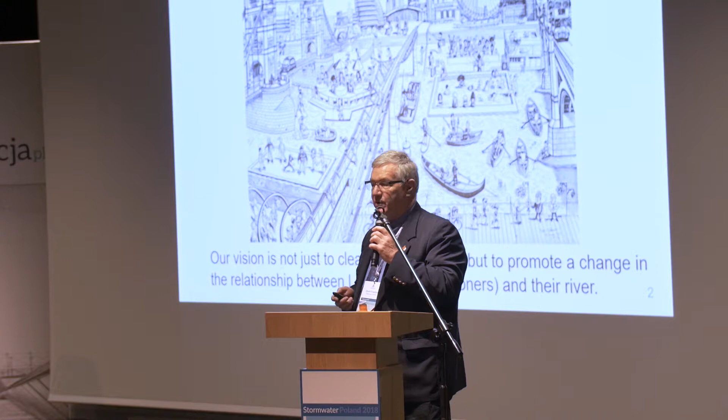We have various challenges, which is to build a new sewer. You know, you may say that's not very innovative. We're building essentially a big sewer throughout central London, but we have a vision to reconnect the people of London to the river. A lot of times their back is turned to the river, so we want them to reconnect to that wonderful facility that's the river.

And our press renamed it the Super Sewer because it is a big sewer, 25 kilometers connecting to another 6.5 kilometer tunnel, so it's a major piece of infrastructure. If we go back long enough in time, London is really built on a swamp, and there were all of these tidal inlets, tidal channels, and over time, all the way from Henry VIII up to the early 1800s, those channels were culverted over and became what we call the lost rivers of London.

In the early 1800s, huge amount of development. Population grew from about 1 million to 2 to 3 million. That put a lot of pressure on those channels because before they were just stormwater channels, and all of a sudden they got their sewage connected to them. So they became pretty rancid. And that led to what we all call in London the Great Stink of 1858, when Parliament even decided to look at moving to Oxford because the smell was so bad, because the river was just an open sewer.

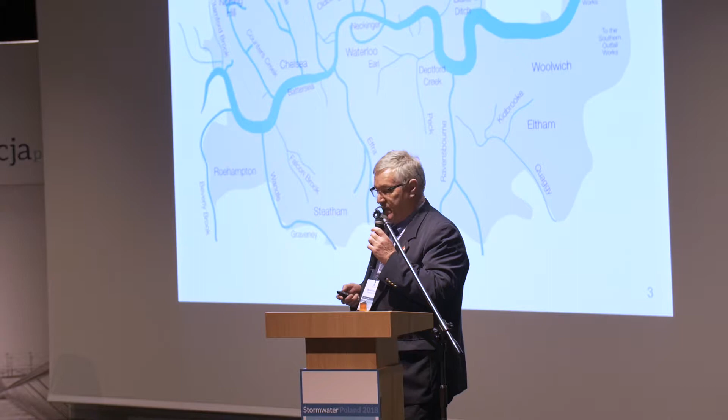That instigated the building of probably the first major interceptor system in the world, and Joseph Bazalgette built this, and you can see here the interception of that sewage that was going into the river. It transported it to the east, and they built large storage tanks, so on the outgoing tide they would flush it and send it over to France and let them deal with it.

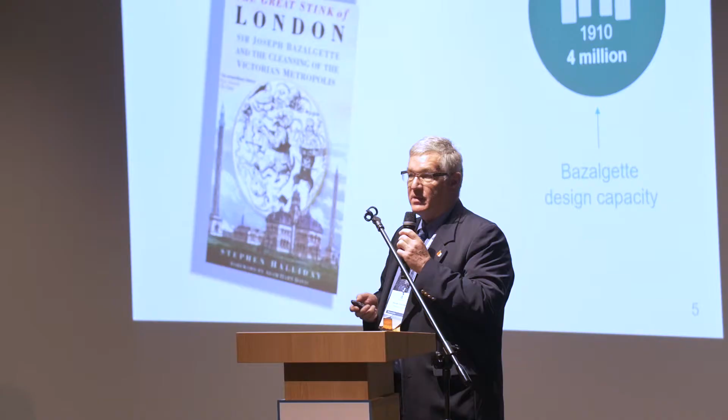The design challenge was, Bazalgette had a population of 2 million to handle. He designed for 4 million, and that was exceeded in the 1910s, so his design was quickly overwhelmed by the population. Fortunately, that interceptor system was made of brick. They used Portland cement for the first time, and today it's still the backbone of London's sewage system. And if you go in and explore it, as some people do, it is in wonderful shape, and it'll last for another 150 years if it's looked after.

We've also mentioned change. One of the big changes that we deal with in London is population growth. And we're trying to size this project to handle 2 million more people, as well as the development that's going on. So this collage basically shows the pressures that we have. Southeast England, and London in particular, has a water supply shortage. They don't have enough water during drought to supply everybody. Everybody wants a washing machine and a dishwasher, so water use goes up.

Development. You know, if you go to London, you'll see development all along the river, which is where the combined sewers are located. So that's more pressure. We have looked at using green infrastructure or sustainable urban drainage, but there's very little space to put that sort of facility in or to retrofit existing development. It's very costly, very disruptive. And of course, what all that leads to is our CSOs, a typical little picture. When it rains, it overwhelms the interceptor system, discharges to the river, and this is an example of one of our major discharges.

In the 1990s until the 2000s, Thames Water, I'm really here representing Thames Water and our new utility called Tideway, developed a scheme that looked at 3 major components. One was the improvements, both in capacity and treatment processes, to 5 major treatment works. They have built what we call the Lee Tunnel, which captures one of the largest CSOs that discharges into a more sensitive water body, that is built and in operation. And in fact, last November, we inspected it and it was in pretty good shape.

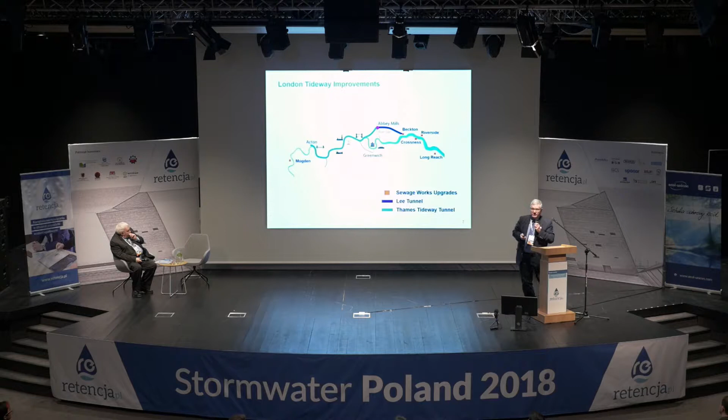To get where we are today, we had an extensive public consultation process. You can probably imagine the turmoil that people would have if we came along and said, this is where we're going to put a major construction site that's going to be there for 7 to 10 years. What do you think of it? And some of those public hearings were very contentious, and in one case we had to get security to escort ourselves out because the people were not very happy with the idea. But we got over it by being honest, by going out and talking to people and explaining why we need it and what we were doing to minimize the disruption to the neighborhood.

Another part of it was planning. The government regulations were such that we could not get a planning permit for the 14 different boroughs that we would go through in London. So we went to the UK government, and there was a process that we could follow to get what is called a development consent. Little did we know that that would take over 150,000 pages of testimony and detailed technical work to prove to the infrastructure planning group that we needed to build this project.

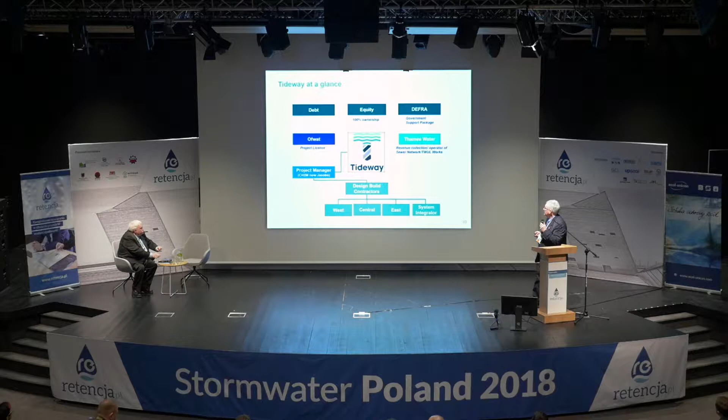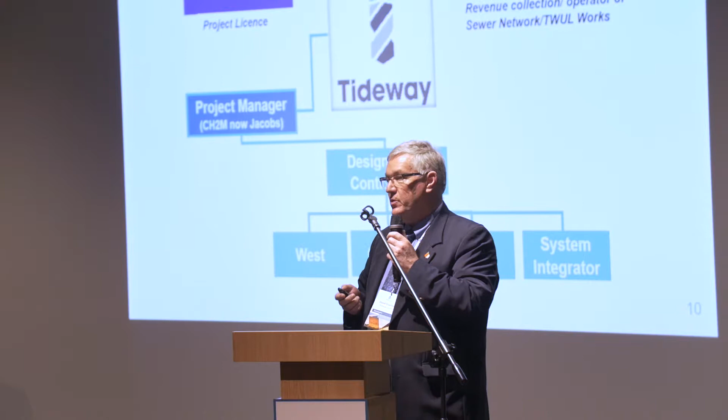I'd mentioned that Thames Water developed the 3 legs of the London Tideway improvements. Thames Water decided that the risk and the cost of doing that would be too much for that single utility to handle. So a new wastewater utility was formed. It's technically called Bazalgette Tunnel Limited after the original Victorian engineer. We operate under the name of Tideway.

And what is kind of unique about this is, as well as going out for a competitive bid for the contractors, we went out for a competitive bid for the financiers. So financial companies were given the opportunity to come in and say, we can finance the construction, finance the operation of this scheme. And it came about that the equity came out of the major insurance companies. In the next slide, I'll show a little bit more.

But what was also very unusual was the involvement of government. Now, Ofwat is the Office of Water. I'm sure you have the same here in Poland. That's the regulatory government agency. It sets the utility rate, how much people will pay for this. And the first thing that we found during our consultation was estimating this would cost about £80, 400 in Polish units, I believe, per year.

With the competitive bidding we did for the financial part of it, the financial companies came in and said, well, we can finance this at a much lower interest rate, given the risk that we're associated with, the surety of getting the money from the customers. That is now £30 a year. So it was a big reduction just because we competitively bid the financing.

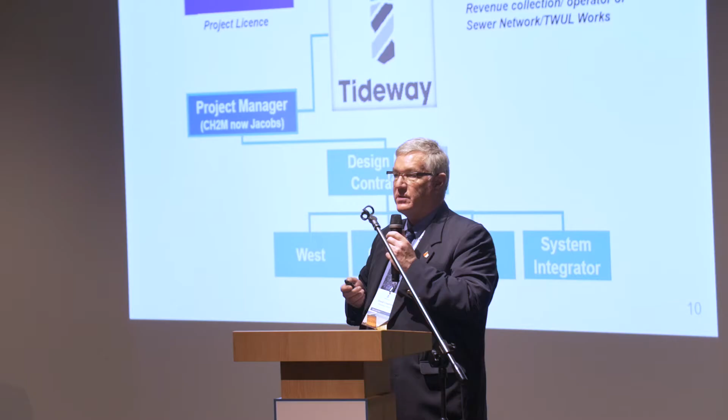We also have another surety from DEFRA, which is the regulatory agency in the UK government that sets pollution limits, if you will. And what they said is, if everything goes wrong, like a tunnel machine breaks or the tunnel machine sticks, which happens for major tunneling, or a major design construct company goes bust, the government would step in and finish the project. That also gives surety to the financial folks and reduces the risk of the whole scheme. I'll go on to the next one.

So this is basically our structure. We have 3 major works contractors in the east, west, and central, and a system integrator that comes along really for the SCADA part of the project. Above all of this is the financiers, and you can see some major insurance companies are part of this. And what we have found is 2 million UK pensioners, their pension is getting the return from building this project, which is very positive. Underneath all of that is our project manager. I work for what is now Jacobs. Jacobs took over CH2M last December, so even bigger consulting firm.

A little bit on the scheme. As I said, we have 3 major works contractors in the east, west, and central. And that's really because of the geology that we're dealing with. In the west, we have clay, so the tunneling methods and the machines are different. In the central, we have basically sands and gravels, a little bit of clay, a little bit of chalk at the transition between the two. Then in the east, we have chalk with some flints in it. So each one of those have unique construction requirements.

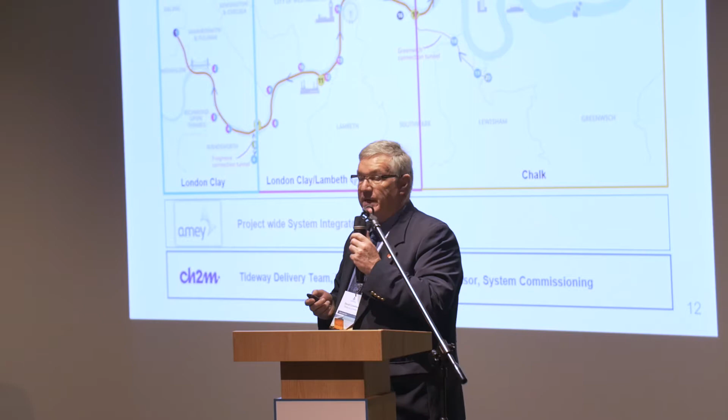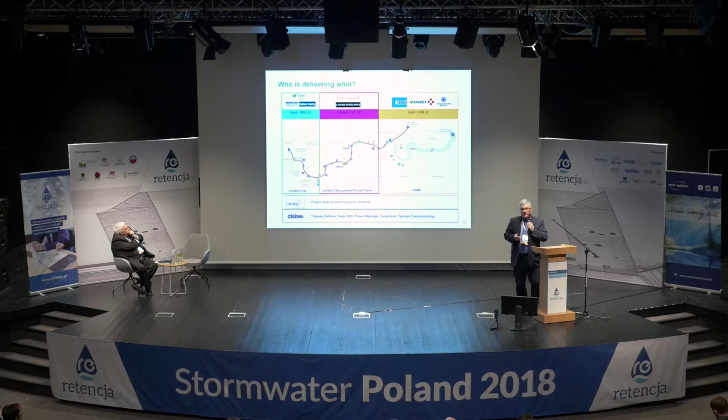And at the top, there are the joint ventures that are formed to build these different pieces. This part of the project is £4.2 billion. The other 2 parts, the works improvements and the Lee Tunnel, were roughly £1.4 billion. So overall, you may as well call it £7 billion as the total cost of improving the water quality of the tidal Thames.

We like to think we're transformational when it comes to health and safety. And one of the things we set up was this center called EPIC, and it tells you there it's an Employee Project Induction Center. We require every worker, every person working on the project, even designers or secretaries in the office, have to go through this

training. What it is, we've hired real actors who reenact a major site incident where a young worker was killed because he wanted to get the job done, got on with it. He hit a high voltage electric line, got burnt, and died. And it goes through the whole life cycle of that incident, to the police investigating it, the bottom left picture, to the pressures from the management who's off in a remote office somewhere, calling the works manager to say, well, why aren't you getting this done?

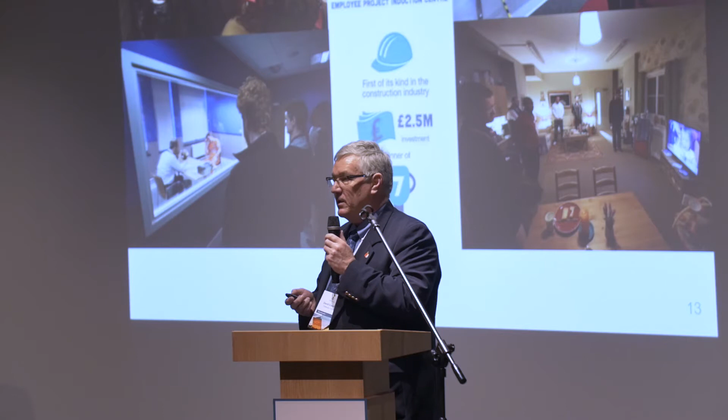All the way through to the impact on the young family that the dad died. So that's the bottom right picture. So we have these processes that go through. It's a whole day experience, and over 7,000 people have gone through that. The long and short of it is, this is a picture of major incidents that cause work-related injuries that you have to take days off.

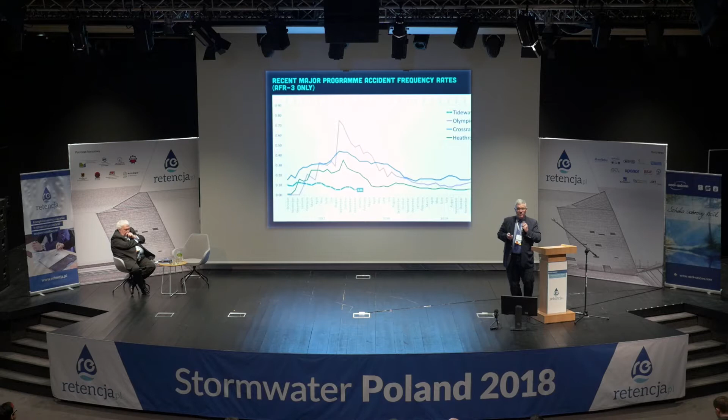Normal projects, there's a ramp up, then there's a bit of a bulge, and what we have here is for the Olympics, the 2012 Olympics, all in London. The Crossrail project, which is a major rail project going across London. The last one is Heathrow Terminal 5. All had a bulge after the project was really getting into the full construction. We're maintaining a very low rate of injuries, simply because people are more aware and more attuned to avoiding injuries when you're doing major construction like this.

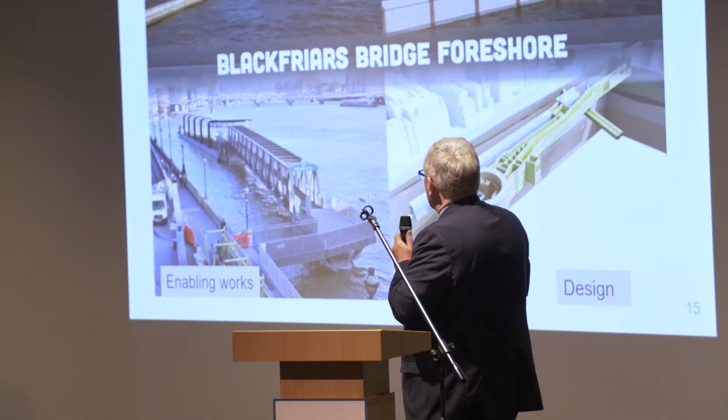Excuse me, 2 minutes left. 2 minutes are left. I got 20 minutes, by the way.

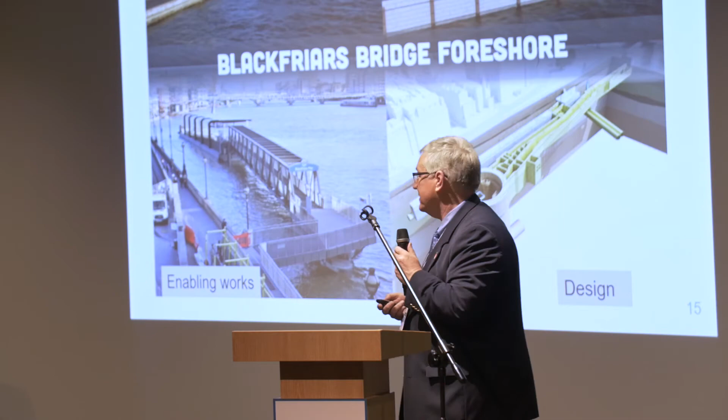I need it. A typical site, this is Blackfriars, just behind the building there on the left is St. Paul's. What we had to do was move that pier to the other side of the bridge, which is what you see at the bottom left. At the end of it all, we are creating some more public space for folks to enjoy the river and the scenes of London. But underneath all of that, it's all the engineering. So that's the shaft that connects one of our major CSOs to the tunnel.

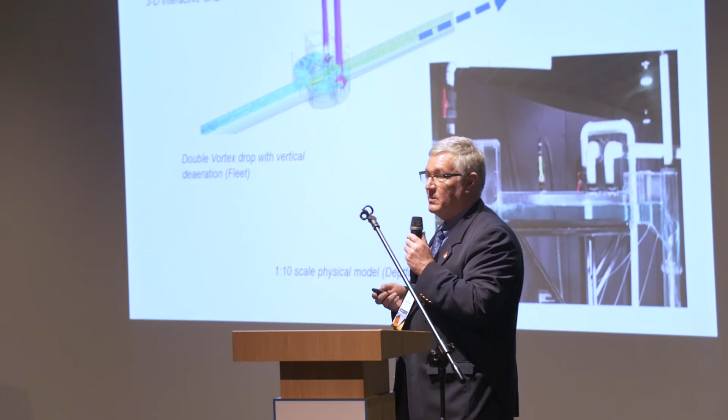And I could talk about 2 hours on this part. So the design is we use all the tools that we got, CFD modeling, 3D CAD for BIM,

he gives me dirty looks down there. I don't know what a dirty look in Polish looks like, but I can see one right now.

Physical modeling, all of that. We have 19 sites, and you can see some of these little pictures. Some of our sites are very constrained. You know, they're in the middle of neighborhoods or in the middle of a park that people don't want to disturb because there's not many parks. I don't know if the photographer tried to get the label straight, but you would think they could have got the label straight on that for the TBM, which is delivered and ready to go.

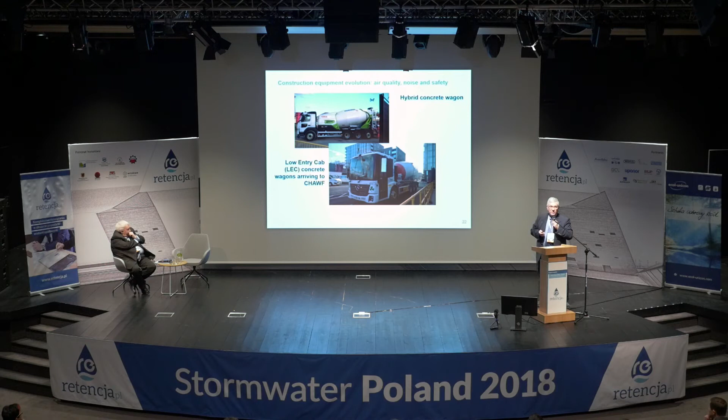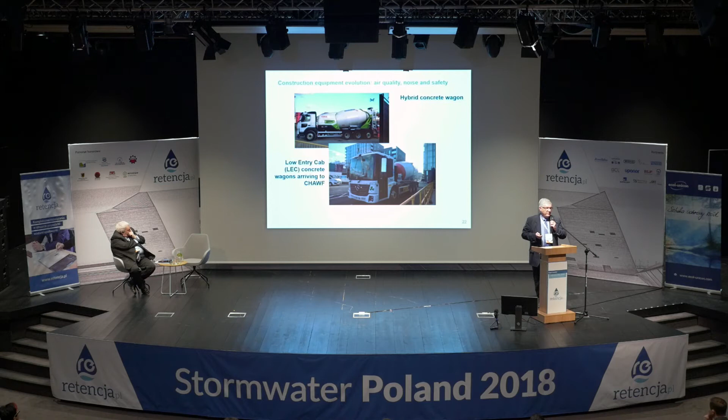We have a big commitment to use the water as much as possible. So you can think of the number of lorries needed to transport materials in and out of the system. So we're using the river as much as possible for steel. We're also looking at how we can reduce noise and pollution. And so in the top left there is a concrete delivery that's using an electric hybrid delivery truck, so it's a lot quieter when it's doing its little spinning of the concrete. Also the high visibility cabs so that the drivers can see which bicycle they're going to run over, if you like, so they can tell that.

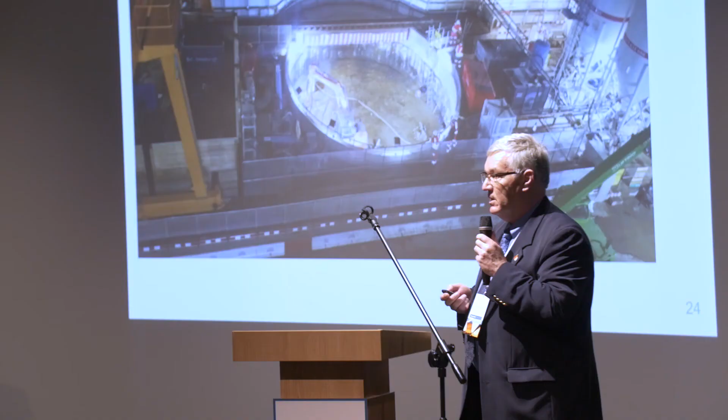I'll just skip that one. So where we are is, I'll wrap it up. Each one of those 20-second slides I could spend an hour talking about.